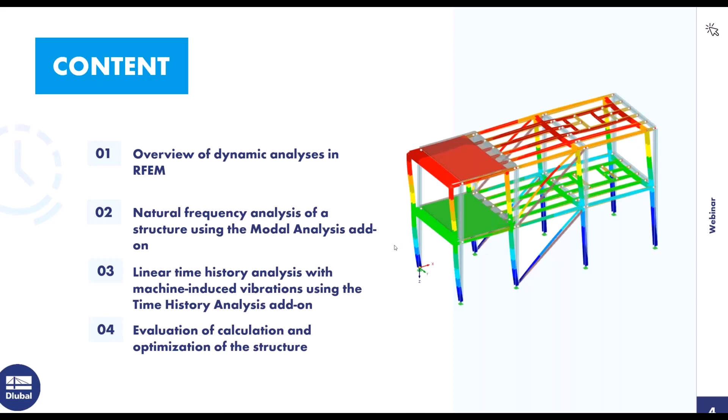The next one we released was the response spectrum analysis add-on. With this add-on, it is possible to do a response spectrum analysis, for example in case of earthquakes. It's a linear calculation in this case.

Here you can, of course, choose a response spectrum according to a design code, for example, the Eurocode or the US code or some other codes, what you want to use. You can also create your own response spectra, maybe also out of accelerograms if you want to do this,

and then the program will calculate for each FE mesh point internally an equivalent earthquake load, and then you will get at the end, of course, the internal forces for the directions and also the combined reactions of the whole structure.

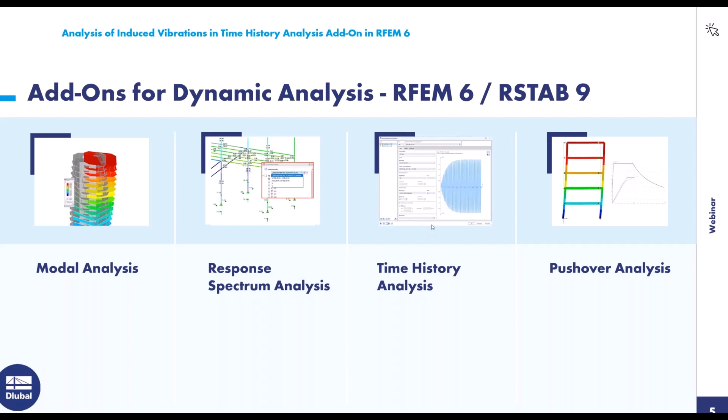And the last but not least add-on module is the time history analysis add-on. In this add-on, you are able to combine time with loads and to get a result out of that. And this one we want to do today, and therefore I created a small example. This is here our practical example.

It's a machine-induced vibration. So just as an introduction, that's a normal steel frame structure with the concrete surfaces here on this side. And we have here a machine which induces a vibration on the structure with a rotating unbalance of 0.2 kilonewtons and a frequency of 5.6 hertz. And then we want to see what happens to the structure when we bring this load with the frequency on the structure.

Therefore, I want to switch to RFEM 6 now. And here in RFEM 6, of course, I opened the structure already. My colleague Andreas will send you, I think, a link with the structure after the webinar, where you can have a look on what we do here today.

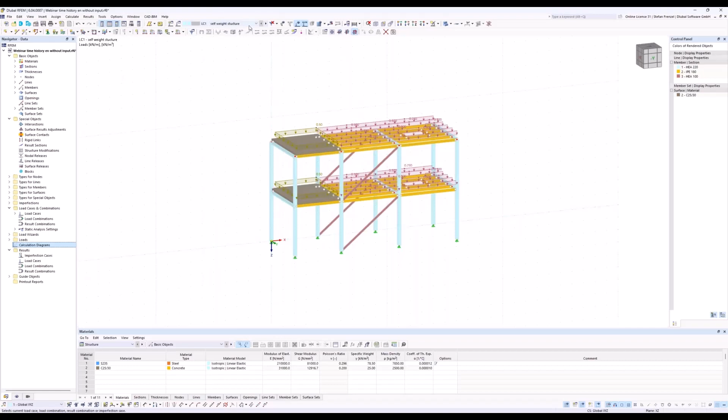Here in RFEM 6 you see at first our structure and also some loads, the self-weight of the structure. And I created also a self-weight of the machine in this case. And I created here a horizontal induced load and a vertical induced load. That's this one and this one. I will show you later how to calculate this. But in the first step, we want to do a modal analysis for this structure.

And therefore, you are able in the program to go in the base settings of your file, and in the base data, you are able to activate add-ons. In our case, we want to activate the add-on for the dynamic analysis, modal analysis and the time history analysis, because we want to use them afterwards also. You see that in RFEM 6 you are able to activate different add-on modules for analysis or for dynamic analysis, or for design of structures, for example, for steel or concrete.

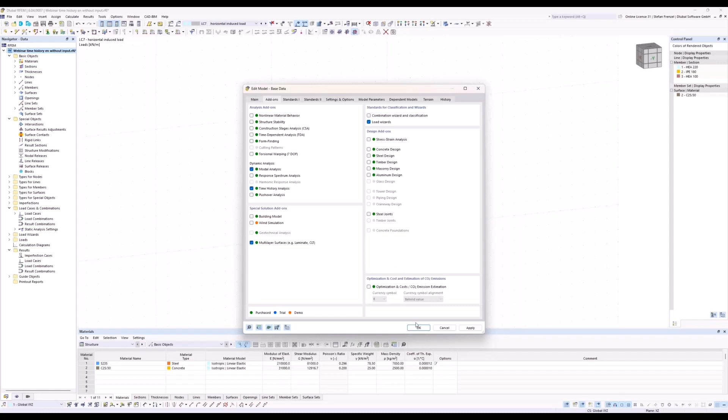So here you're able to switch it off and on in the add-on tab in the base data of the program. So in our case, we want to do this, and we say okay. And now we want to do a modal analysis for our structure. How can we do this easily? So that's the first question.

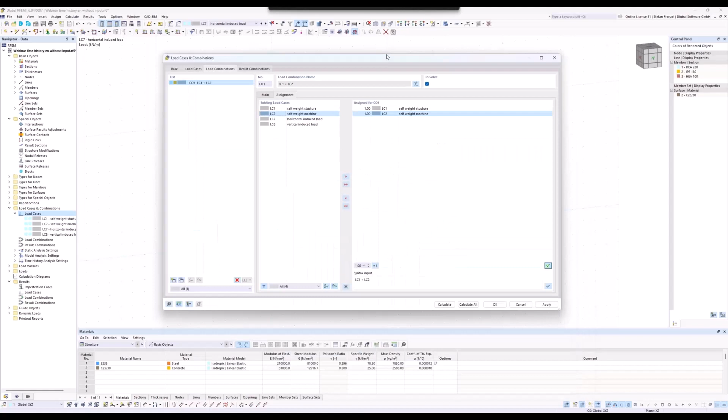Therefore, I go here in the load cases and go at first on edit. You see that we have here 4 different load cases. For my modal analysis, normally I need 1 load case. That makes it a little bit different because here I have to create at first a load combination to assign these 2 load cases. Here I want to assign load case 1 and load case 2 because I want to have a look on the eigenvalues of the structure when the self-weight of the structure and the self-weight of the machine is available, and therefore I took these 2 load cases for that.

It's not necessary to choose another static analysis setting here, because for the modal analysis we just use the masses which are in the vertical direction, or Z direction. So therefore we can go back to the load cases, and here we create a new load case. It's load case number 9 now.

If you want to perform a modal analysis in the program, you just have to switch the analysis type to modal analysis. If you switch this to modal analysis, you will have a new option, which are the modal analysis settings. And of course, the program wants to know which self-weight or which load should be used for the modal analysis. So if you have a load case with loads in it, then the program will automatically convert the loads into masses.

But it's also possible to create masses in the load cases, and then you can use these masses. In our case, we want to use load combination number 1, which is made out of load case 1 and load case 2 together. And these masses we want to use now for the modal analysis.

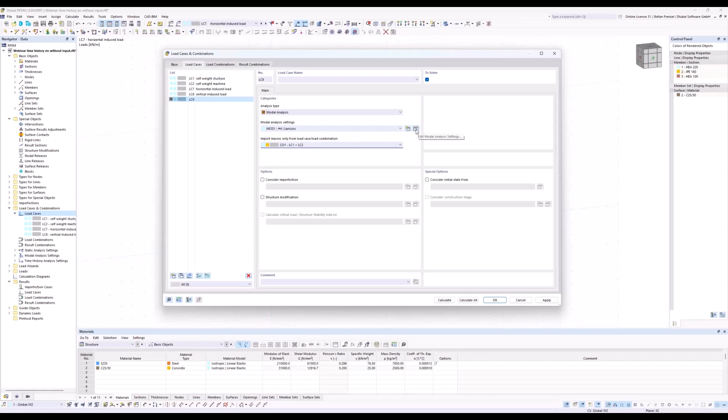Here I just have to go into the modal analysis settings, because for this modal analysis I need a number of modes. It's not 4, it's 30. So I need 30 eigenmodes for the calculation. I know this because I did it before, of course. Otherwise, you have to choose your own value, or you have to prove it. So the mass matrix should be consistent.

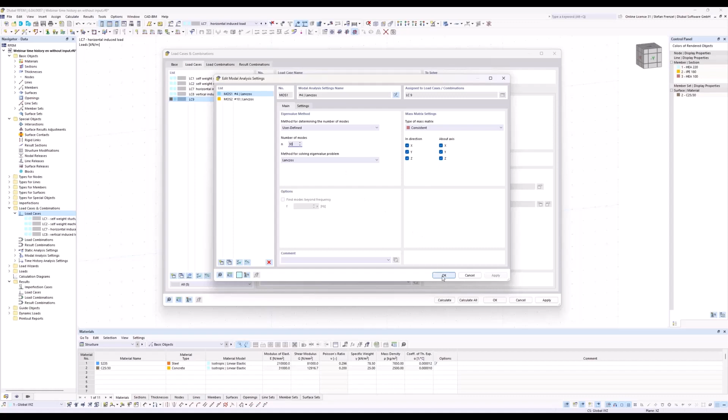That means the masses are distributed on the members via a function. That's normally the best way to do this, because it's the best way to consider the masses exactly on the structure. Then we can click OK, and we can do a calculation.

Now you see the program will mesh the structure first, and then the program will calculate load case number 9. It's not necessary to calculate load cases 1, 2, or the load combination, because we just took the masses from these load cases or load combinations. Our first natural frequency you can find in the result navigator. Here you can switch to the eigenvalues.

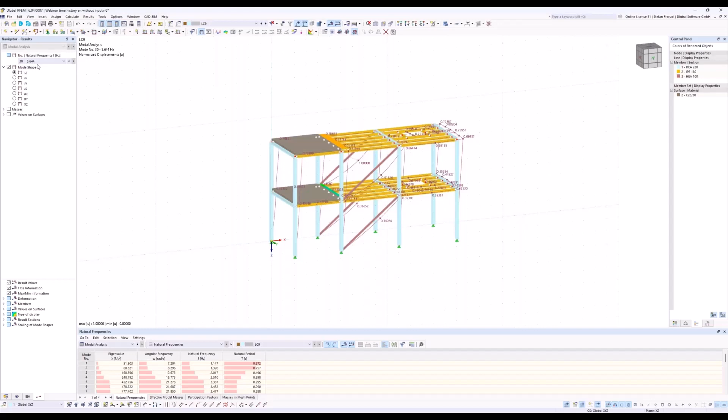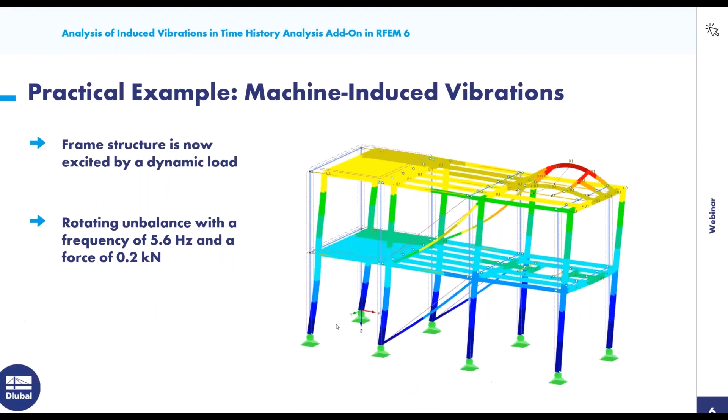But here's a really good eigenvalue. It's also 5.6 hertz. It's like our induced vibration, and you can see the structure will move in the x direction globally. That's normally not so good when you get this. In this case, I will switch back to the presentation.

We have to define now the input values for the time history analysis. I told you that we want to use 0.2 kilonewtons as rotational mass, or unbalanced mass, of the machine. I have to calculate these 0.2 kilonewtons to the member length, and then we get 0.025 kilonewtons per meter. And this I bring on the structure in load cases number 7 and 8. You see here the 0.025, and here also I just divided it by the member length where the machine stands on, and then I calculate this value.

So if I go back to the input values, I have to define now two diagrams, one for the horizontal and one for the vertical. The difference between them is just a phase shift, and that's all. By the rotation of the mass, I have a vertical maximum load and a horizontal maximum load, and it's described by a circle. So that means I have to use a sine function for that.

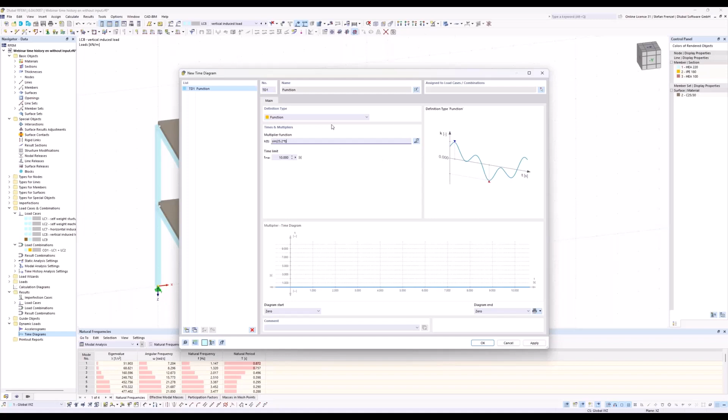And then you should get the result for it. So we want to get a sine function. In this case, I don't call it function, I just want to call it horizontal part. Sorry, there's an R missing. Like this. And I copy the whole function again, and here I just add the value 1.5708 to get the shift. And I will change the name to vertical part.

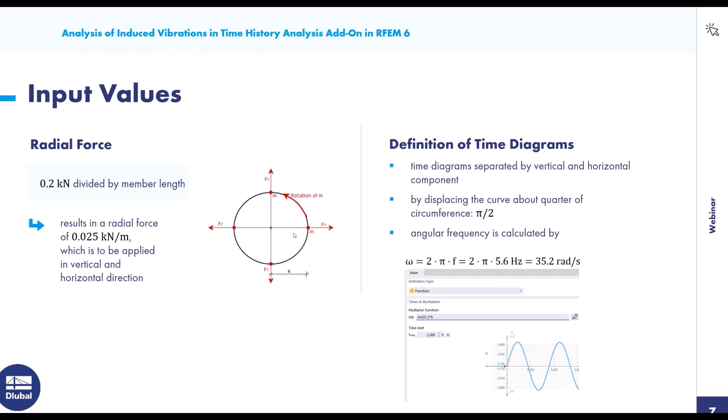So these two functions describe the induced vibration of my structure, nothing else. And here you see the shift between them. Here we start with a maximum, and in this one we start with 0. If I go to my circle, when I have a maximum force in one direction, the force in the other direction is 0. If I rotate 90 degrees, the other one is maximum and the first is 0. Therefore, I use the function to get the same behavior, like in my presentation.

Sorry for the interruption. In the PowerPoint, you used 35 rad, and in the... Oh yeah, that's correct. It was my fault, just a typing error from my side. No, I have it also on my letter here, 35.2. Okay, thank you for the interruption. Then we can go on. Okay, I changed to the value 35.2.

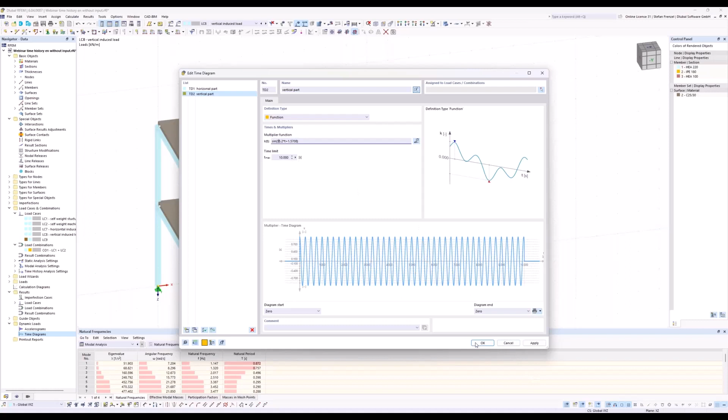Next I want to show you that we have an angular frequency of 35.4, which is near to 35.2. That means I could get a resonance in the whole calculation, because of the horizontal part. That's my horizontal load. If I look at this eigenvalue, I just go to load case number 9, and I see a deflection which is also in the x direction. That means you have to be careful, there could be a resonance in the structure.

With this knowledge, we go now to the time history analysis, to show, hopefully, that there's a resonance in the structure. Therefore, we create a new load combination, and in it we change the analysis type to time history analysis. That means we can assign load cases, and to each load case a time diagram. So we have a horizontal load with the horizontal time diagram, and a vertical induced load with the vertical part of the time diagram. That's normally all.

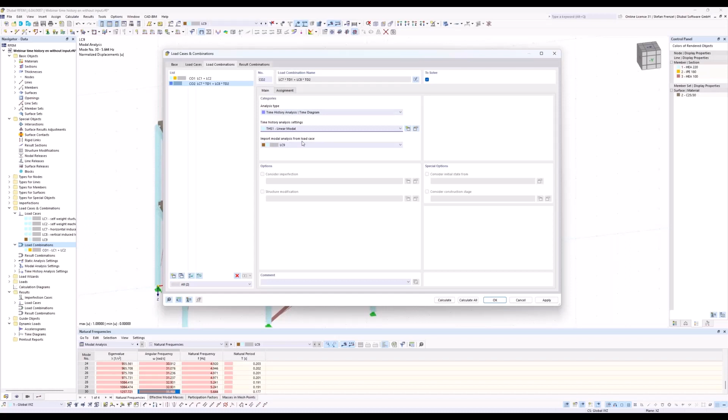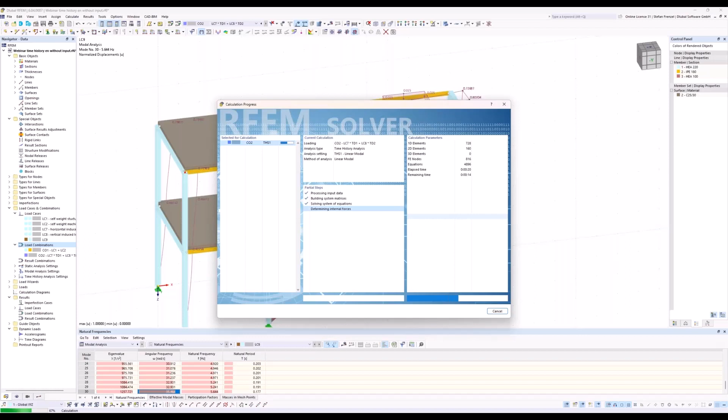The program will now perform the time history analysis over 5 seconds with a delta t of 0.01 seconds. So there will be created a lot of results, of course, but it's in this case necessary because I have 5.6 Hertz as induced vibration, and therefore I need, of course, a small time step. So, okay, 35 seconds, it was not so long.

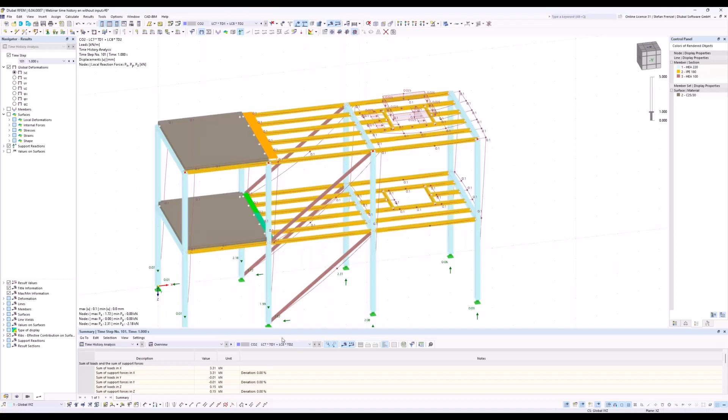Okay, so what's the result of that now? The results are also like in RFEM 5 or like in the old program. You get the results here as a summary in the global table of the structure, and maybe some of you know or used the old one, and here it was possible to create also directly a diagram. Because it makes no sense to have a look on a diagram here, I can't see anything.

So I can of course switch here through my time steps, but it makes not so much sense because I normally pick one point and I want to see this point over the time. What's happened to this point? And therefore we have here calculation diagrams, which you can find in the data navigator.

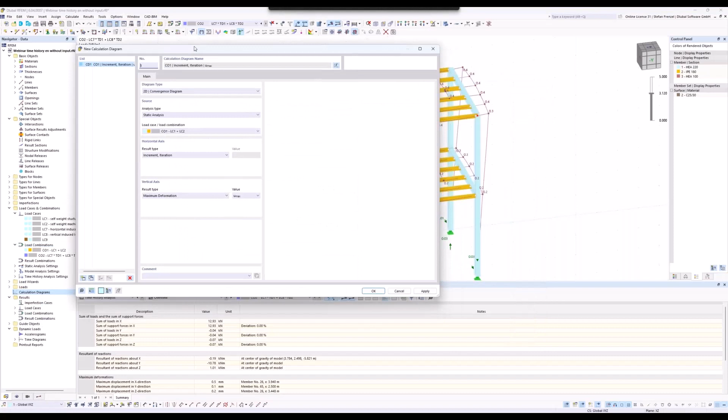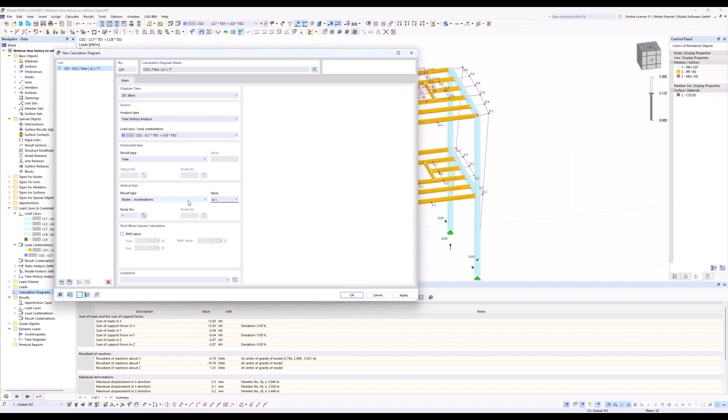If you just click here on new calculation diagram, you will be able to say, okay, you want to have a basic diagram, 2D. We want to have a diagram from the time history analysis, load combination number 2. That's correct. And here, for example, I want to have a look on the nodal accelerations. That makes normally sense. So I take this one, okay, and I just have to click on a node. Maybe I want to have a look on this node.

That looks not so nice. Maybe we take this one. No, wait, X. X looks nice, yeah. So the X direction. The other one, this one here, it's made out of all directions. Therefore, it looks a little bit strange.

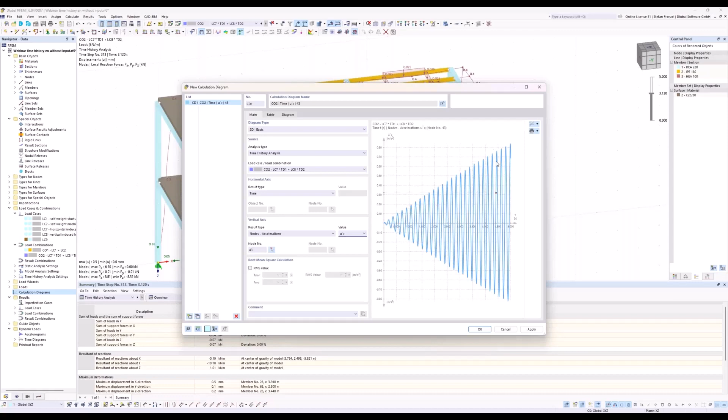But in our case, we should have a look on the acceleration in x direction, and here we can see, of course, a nice picture of a resonance calculation. That means the resonance is really high. So we will get a resonance in the structure, and maybe that's not so good because now our structure can get a failure by this.

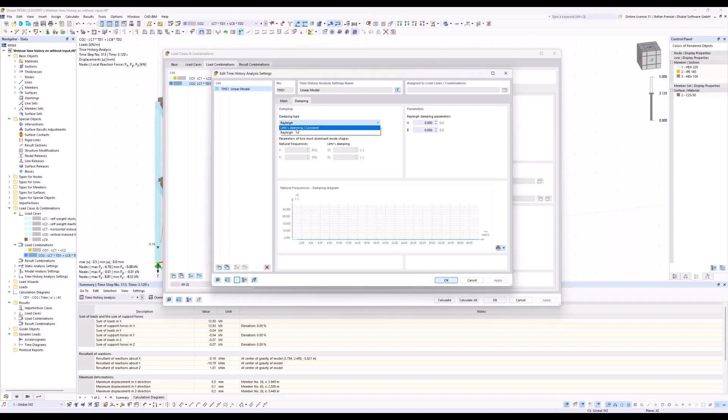What we can do now is, of course, we can go to our load combination number 2 and say, okay, normally if I do a time history analysis, there is also a damping. Here in our case, if we use the linear modal analysis for the time history analysis, we are able to use the Lehr's damping. And here I want to use a damping of 0.02.

If I use here the linear implicit Newmark solver, then I'm just able to use the Rayleigh damping coefficients. Therefore, I have to calculate them at first. This is easier because you find it also in the literature. You find damping values or Lehr's damping values for structures made out of steel or concrete.

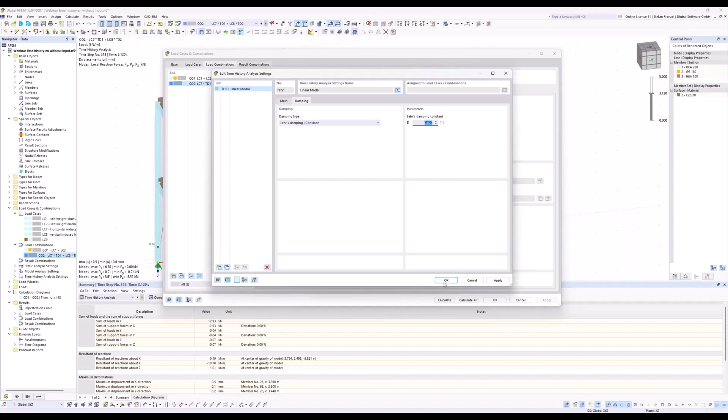In our case, we want to use 2% of that, and then we just have to recalculate the whole stuff. So that means for us, we just calculate load combination number 2 again. And then we will hopefully get, of course, here also a result.

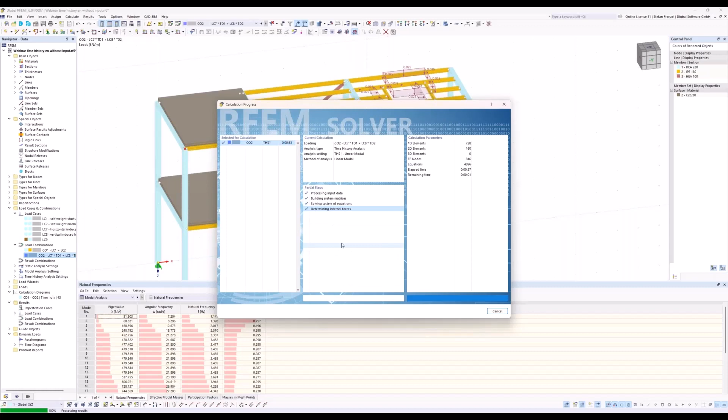So, okay, now we are nearly ready. Okay, so we see that we see nothing.

So really, that's why we go back here in time on the calculation diagram. And within the calculation diagram, I see now here a maximum of 0.24 meters per square second.

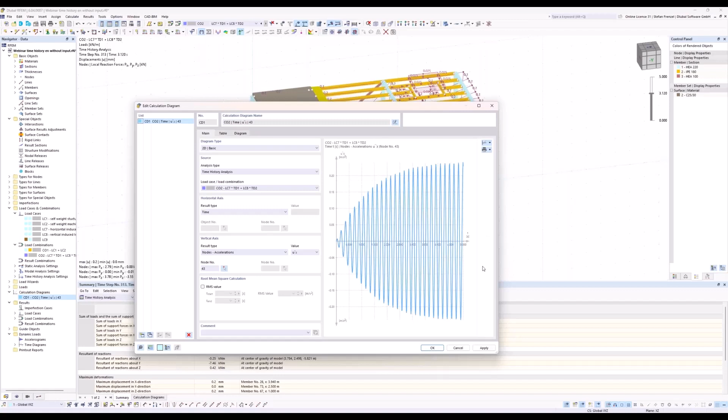That's of course a high value, and that could be, of course, also by using the damping, that it's not sufficient for us or for using the whole building like this. So now we come to the point where we have to optimize normally the structure.

So one optimization could be we use another machine, because if we have another induced vibration, then maybe it could work. But normally, it's also possible to change something in the structure.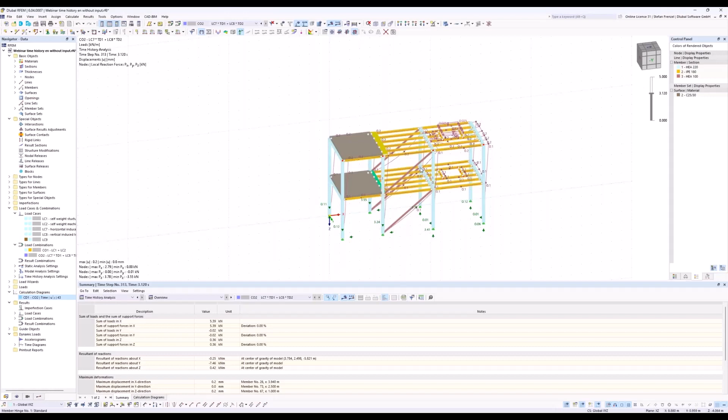Here in this structure, I want to change the bracings because here maybe I took another axial stiffness for these ones. Then of course the eigenvalues of the structure will change, and hopefully it's then possible to use the same machine, maybe with another bracing or another cross section type for that.

But how can we perform such an analysis? So therefore, we have to go first into the special objects. In the special objects, we are able to create a structure modification. A structure modification could be here for sections.

In our case, we want to change the sections, and we know that our HEA 100 is here the bracing. Here we want to use, for example, double the stiffness of the area, or double area for that. So that means for us, of course, the axial stiffness will be doubled.

And another option could also be that we copy the structure modification and say, okay, maybe we take just the half of the stiffness for that. Could be also an option for us, because an HEA 100 is maybe too big, this cross section type, in this case.

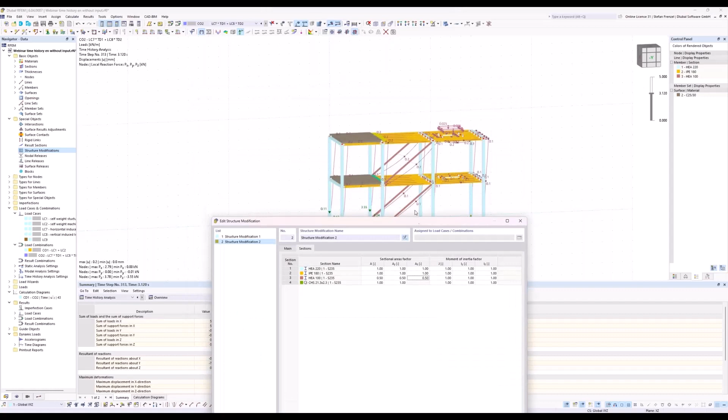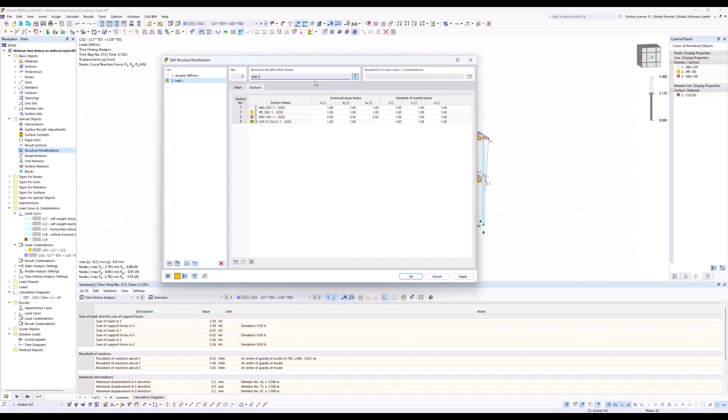So here we created now 2 structure modifications. I will change the name here, I will call it double stiffness. And I will call this here half stiffness. And that's all for us.

And now I want to consider this double stiffness or this half stiffness in the calculation of the time history analysis. So therefore, I just have to edit my load combination or my load cases, because here for my load cases, I have to consider now also the stiffness modification.

That's also really easy, because here I just have to copy the load case number 9 to load case number 10, and here I want to have the structure modification double stiffness. Then I copy it again, and here I take, of course, the half stiffness of that. That's all for it here.

For the load combinations, of course, I have to do the same. Therefore, I can go here in the load case or in the load combination. I just copy the load combination, say, okay, here I want to have load case number 10. If I choose here load case number 10, the program knows that in load case number 10, a structure modification was used, and therefore it is also used here in this load combination again.

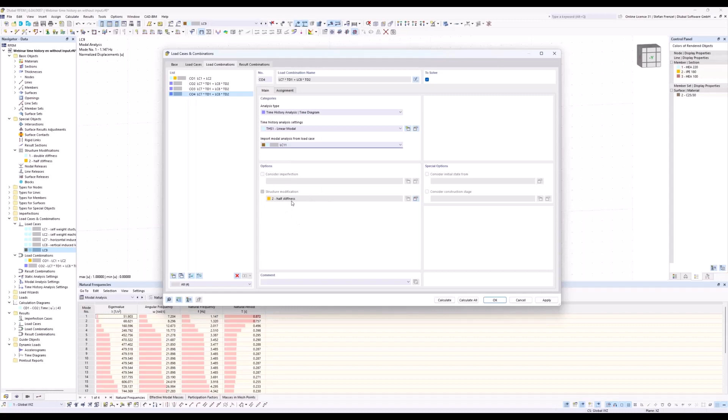If I copy this load combination again and say, okay, here I want to use 11, then the program will automatically take the half stiffness, because this one was used in load case number 11. Okay, and that's all. Now I can go on calculate.

So you saw that the program will calculate at first load case number 10 and 11 because they are essential for combination number 3 and number 4. So it's not possible to calculate load combination number 3 and 4 alone. Therefore the results have to be first calculated, and this was done in load case number 10 and number 11.

Okay, then the program will do the calculation. I think it will not take so long.

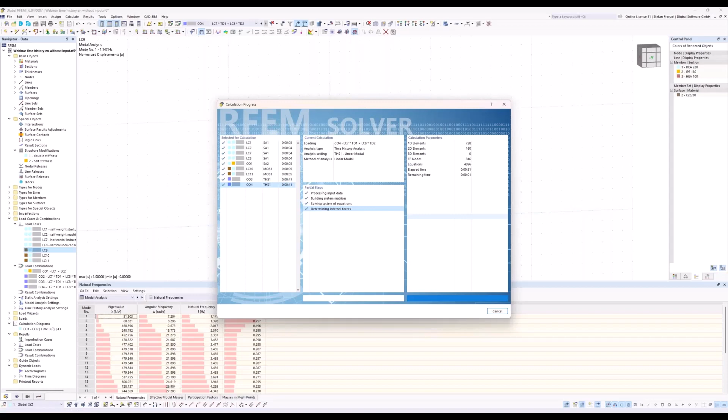Okay, and now we have the results here. So then maybe we can have a look on that at first. We can go to the result diagrams and edit them.

So we see that we had a look on load combination number 2 for the acceleration in x direction at node 43, and here we get a high acceleration, caused by the resonance of the structure.

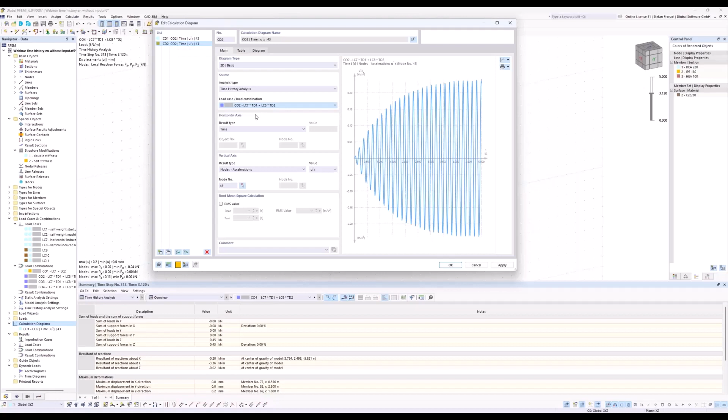Then I will just copy this calculation diagram and choose combination number 3. You see that at the beginning, it's the beginning of the induced vibration, and after this beginning, the structure will vibrate with constant values normally.

But you see that the accelerations are really small. They are so small it's not possible to have a look here directly on them, so it's normally nothing. This is the result when I do it with the double stiffness of the bracings.

If I use the half stiffness of the bracings, then the result looks like this. So that means if I use smaller cross sections for the bracings, I get an acceleration which is also really small, 0.03, instead of 0.2 meters per second squared.

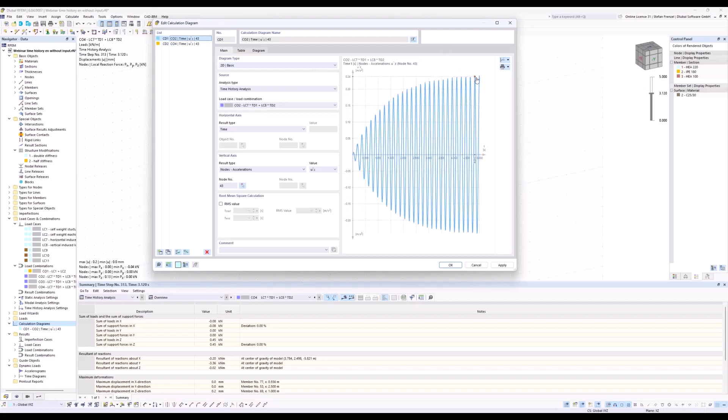And therefore you can also choose maybe a smaller or a bigger cross section. That depends on you and maybe also on the stress level of the structure. But normally these bracings could be really small because you just need the actual normal forces in them, since they are hinged at the start and at the ending, so it's normally not so necessary to use big cross sections.

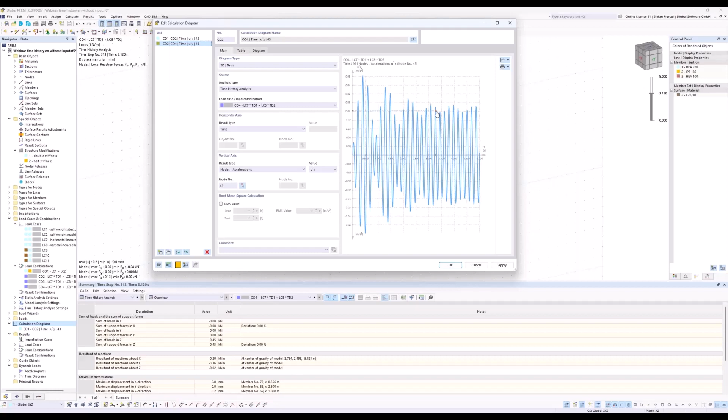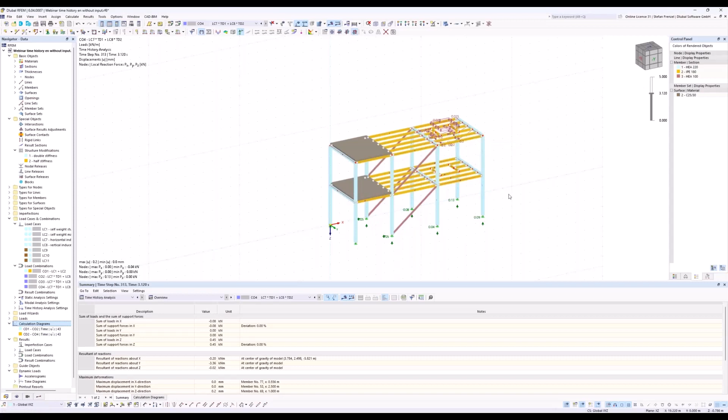So in this case, just by changing the bracings, you will be able to work also with this machine on this structure, because the induced vibration is then not necessary anymore for the structure. But it's always good to have a look on such things, because nobody could notice that we get an induced or resonance case like here for such a machine when I put it on the structure. Therefore, you can design such a structure just by choosing other cross-section types or using the structure modification to get a result for the structure which is usable at the end.

Okay. Andreas, are you there? Sorry, yeah, I had to unmute myself. Thank you for the presentation.